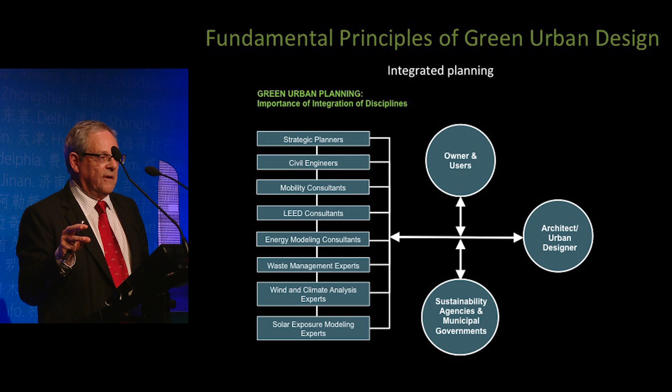The other piece, fundamentally, is that all of these specializations talked about in our separate programs throughout the sessions have to happen at the same time and have to be integrated with the client, with the agencies and everyone else. Without that you'd have a much less efficient process, which is what we've been at, and what we have to get to is this more integrated process.

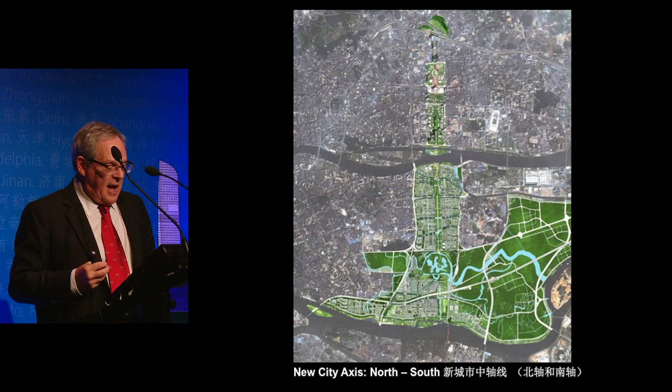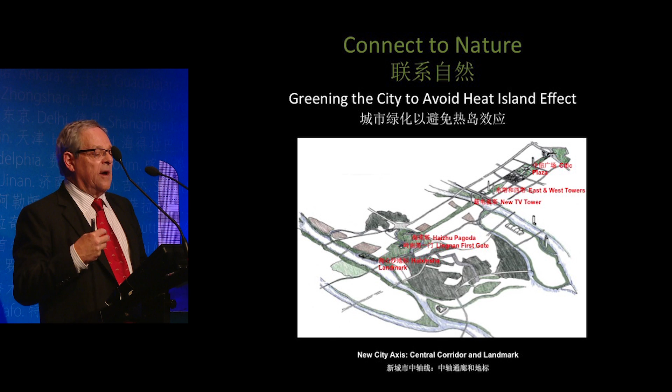In Guangzhou, we were asked first to do the north axis area, and then the south axis area, which is about 20 square miles of urban development in an existing urban context. The main thing we did was to create a transit-based, legible organization for the heart of what is really the emerging newer center of Guangzhou. The idea was to address some of the chaos of before with a transit-based and people-based system.

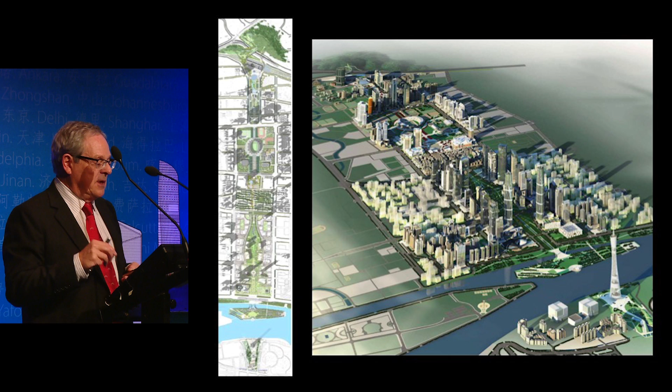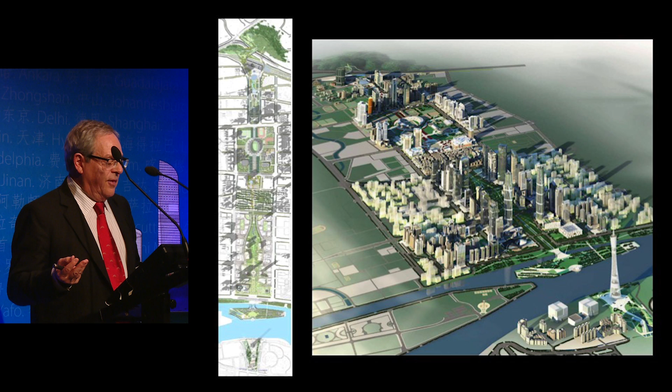Here is the north axis portion of the site. The plan was beginning to be developed, but it was car-centric, and you couldn't even cross the street to get to anything, which is one of the things about Guangzhou. So over the last 5-6 years, we've kind of turned that on its head and driven very hard at the idea of density and amenity together, but also the walkability that connects you from one place to another.

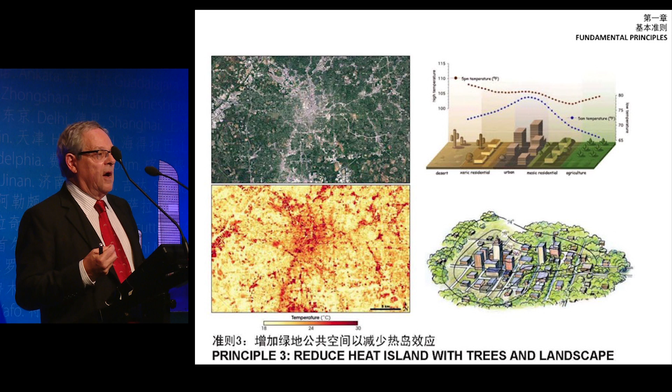As you will probably all know in this audience, the introduction of green space is essential to the reduction of the heat island effect of cities, which is, as part of global warming, a very focused, vicious cycle. So moving from the amenity side to the transportation side, let's talk about what we are trying to do.

This integration process is, as the previous speaker said, an integration of multiple transportation systems. So it's not only subway, for example, but also combining that with light rail, combining it with high-capacity monorail, and in the Beijing case, I've been discussing with them a maglev monorail system, which has a much higher pedestrian capacity because it's got a lot more energy within it. That's a low-speed monorail system.

And then, of course, BRT, which is the entry level, the buses with the dedicated lanes. So in the Guangzhou example, in the south axis, you can see that the layout is amenity-driven in its organization, but equally importantly transportation-driven, and the densities are related to the stations and nodes of the metro system and the new light rail system that we've designed into this south axis area.

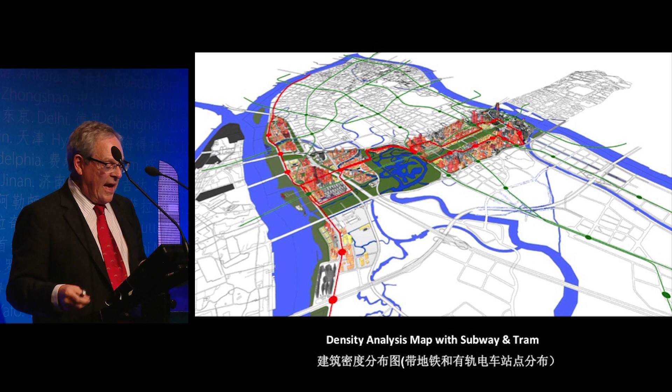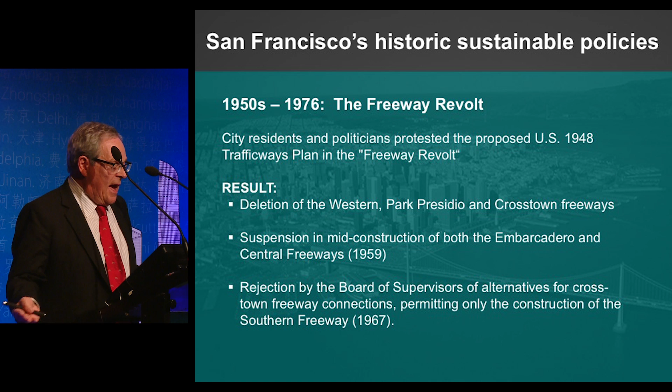The priorities were wrong, and we had a freeway revolt in the 1950s, and we stopped all the freeways. No more freeways, and then we started tearing them down. It's been actually a magnificent transformation, and there's no terrible fallout in the vehicular world.

Then layered on that was a transit-first policy. Transit-first policy is not only do we want to control the cars, but we don't ultimately even want them. We want people to be using every other means of getting around that they can, and kind of push the car out of the equation.

Again, it's being increasingly sensitive, and it's being increasingly successful. San Francisco these days is a great magnet for tech companies and others because people want to be there because of quality of life issues. The other side of that coin is the threats in places like Beijing and Shanghai, where people don't want to be there anymore because of quality of life issues.

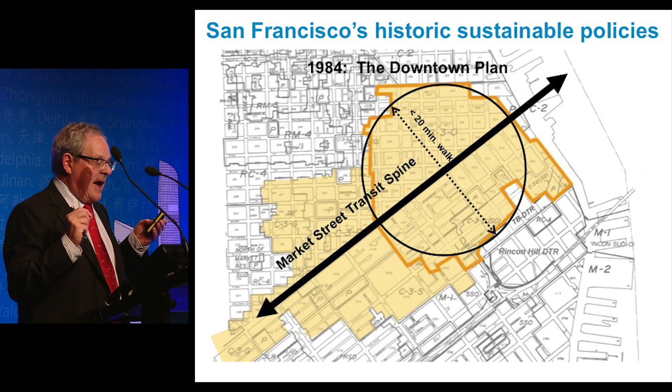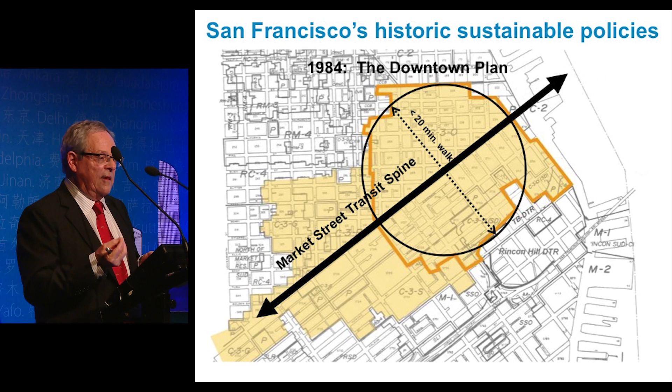So the next major step was San Francisco's downtown plan, and the essential element of that was a compact downtown—not a sprawling downtown, but a compact, fairly high-density downtown. In the heart of this, on the south side of Market Street, is the Transbay Center.

As you can see, there's been a multiplicity of policies driving us to where we are today. It didn't just happen because somebody wanted it, and it didn't happen overnight. So we have Rincon Hill emerging here, and the Transbay Transit Center here. I'm going to be talking about this project called 181, this is the Transbay Tower, and this is a new project at First and Mission as well.

So the Transit Center is the hub of the Bay Area, and it's intended through its development to continue to be that. There's a kind of economic driver as well as an environmental sustainability driver. The plan itself takes the district and develops it.

What's interesting about this slide is this is from about early to mid-90s. And what's really interesting here is San Francisco is such a protective area that they thought this was big time, all these little buildings. This was going to be big time. But the world has changed, and San Francisco has become global, and now it's about this. And it's much better for it.

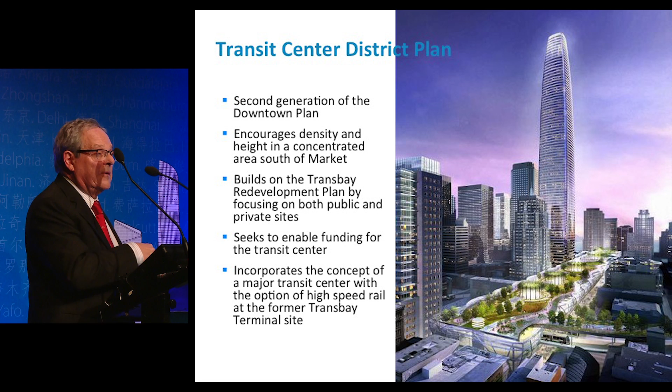So here's our high-speed rail / Caltrain / bus terminal, and it has a 5-acre rooftop garden on it. It's being built, it's under construction. There's a whole plan for higher density buildings with height bonuses they get in return for helping subsidize the financing of this new center.

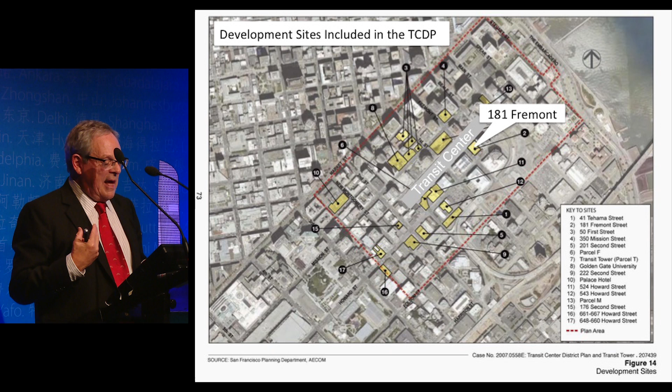181 Fremont is in that area right next to the station and on the opposite side from the Transbay Tower itself. This is today, about 4 years ago, and this is the ultimate plan with high-density towers, very walkable streets, and an open space plan all integrated with that.

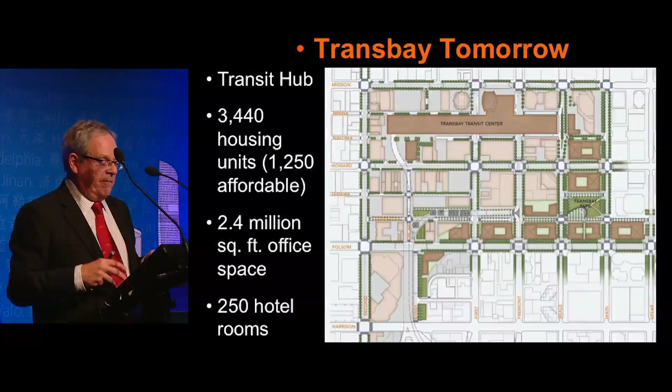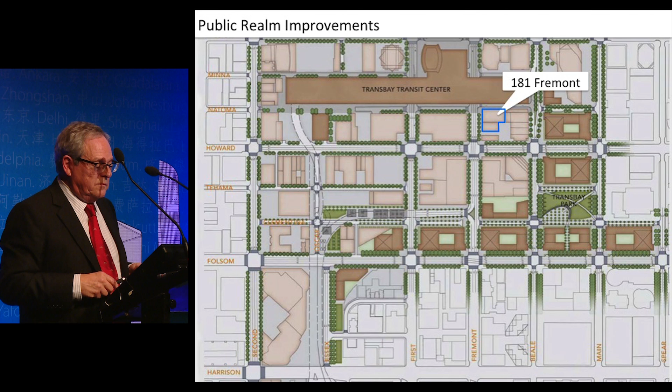More intense development—181 Fremont, as I said, is in a very good spot, immediately adjacent to the transit center. The Transbay Tower itself is right here. And so this is an early illustration of it.

181 is this project, and layered onto its transit proximity, it's a mixed-use project. It is residential on the top portion and office on the lower portion, so it's a jobs-housing balance intended project, with an amenity floor in the middle.

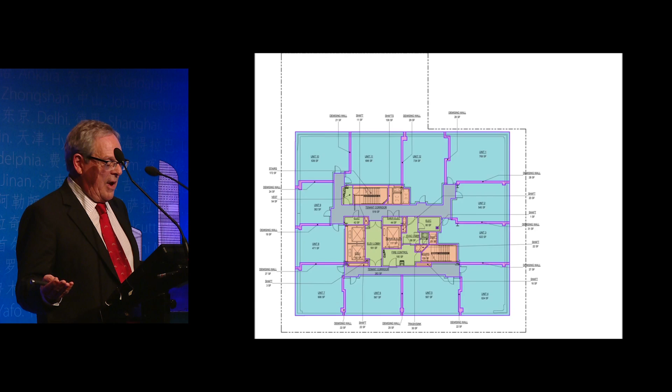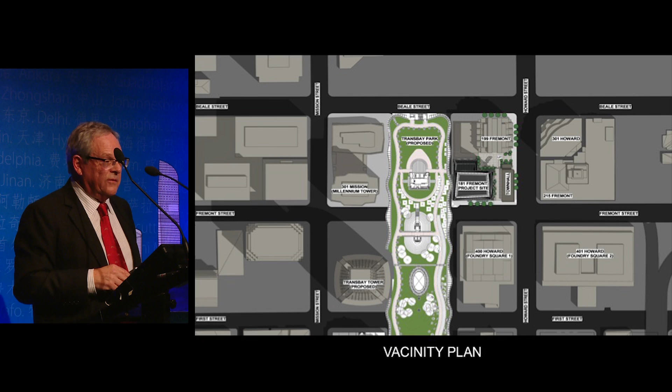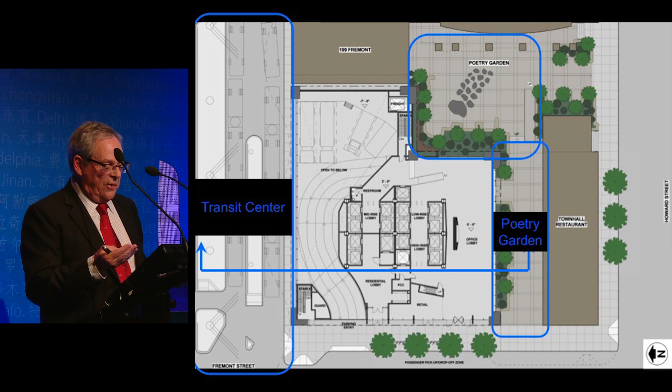There's a series of buildings happening around the transit center. On our ground floor, we have our relationship to the transit center here, existing open space here, and cutting a section reveals an interesting technical issue: the box for the trains has a certain geotechnical impact and implication, so our box has to be at the same height as theirs, and we stuff all our cars and equipment into that. We were driven by technical reasons to be at exactly the same place. Our bridge is up here, and the roof garden's right here.

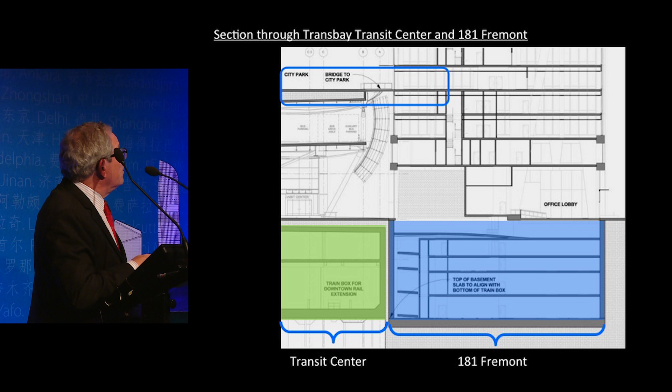On the 5th level of the building, we have an amenity level with retail, publicly accessible during the day. But more importantly, people can come by train or bus, whichever forms serve the area, take the escalator to the roof garden, and go directly into the building, maybe have a cup of coffee on the way. In the evening, they can do the reverse, and residents can come down to this terrace area and go out on the roof garden. So it's the bridging concept talked about this morning, and it's really happening.

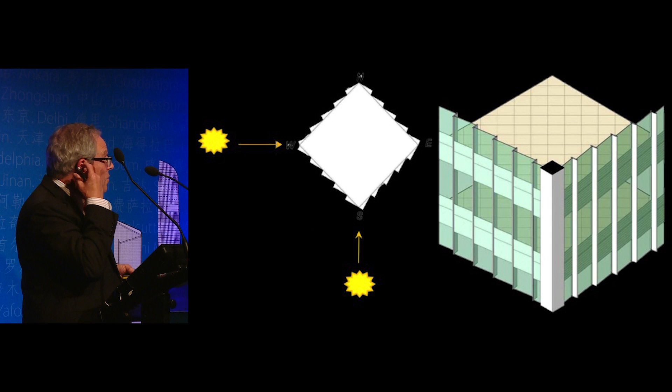Unfortunately, it's only going to be ultimately maybe 3 or 4 buildings able to do this, but we're quite excited to be one of them. Talking a bit more about the building, it's going to be LEED Platinum. The geometry of the skin is made to reduce solar loading passively - about a 6% lowering of solar impact on the building just because of the geometry. The building shape also makes for an interesting aspect.

Here's the relationship of the building to some of the older structure and the new transit center as a transition element. The ground floor, because of the exoskeletal structure, is column-free on the perimeter, so it'll have a marvelous indoor-outdoor aspect with the gardens around it on the south and east. Like I said, LEED Platinum - interestingly, we went from gold to platinum for less than 1% of the cost of the building, which was a powerful statement about how this is all trending.

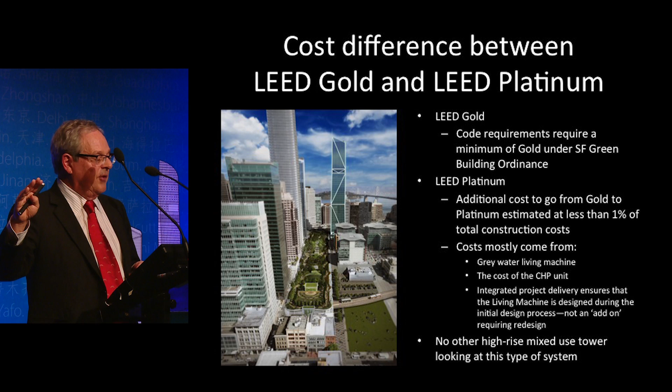To summarize the building: there are several things going on here. Transit-oriented development is the main thing in relationship to this talk, but in addition, it's mixed use with jobs and housing, although it's not cheap housing. It's a very efficient structure because of the exoskeletal aspect, has a solar passive skin, and has active systems to achieve the platinum rating. It also has pedestrian connections not only at the ground but also at the upper level. We're hoping it becomes a real role model for these kinds of projects.

I'd like to see here in China much more of this kind of thing clustered around the high-speed rail stations. In fact, I'm in active discussions with various planners and officials about that.

Final comment: so we're doing new LEED Platinum here. Our office is at the base of the Transamerica building, which was built in 1971 and had nothing for sustainability, and has been retrofitted to platinum. It has a cogeneration plant. They save $600,000 a year on their energy bill, so the payback on the cogeneration is about 4.8 years. Pretty great stuff.